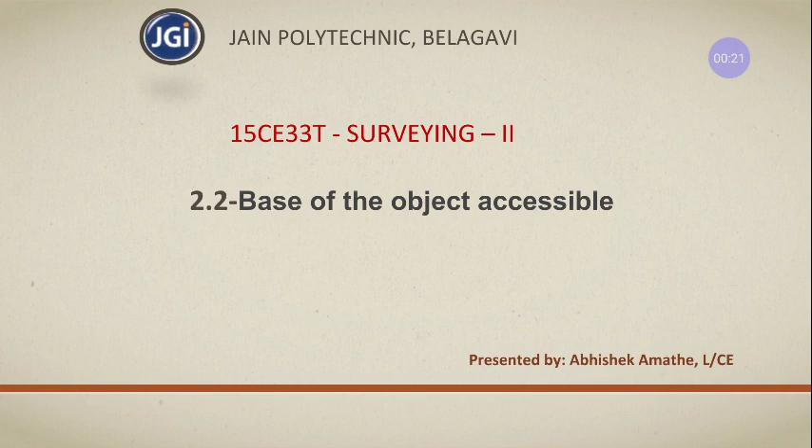Hello students, welcome to the second lecture of the second unit, that is the base of the object accessible lecture. In this lecture we will be studying what is base accessible of the object, and we are going to solve a simple problem over it. So in the content we are going to understand what is the base of the object accessible and then solve a problem over it, right?

So before going to that, we'll once again refresh ourselves. What is trigonometrical leveling? Trigonometrical leveling is an indirect method of leveling where you are going to calculate the relative elevations of the points from the observed vertical angles and the horizontal distance, with the help of the trigonometrical functions, and you're going to calculate the elevations and the distances. This method is also known as height and distances method.

It is also known as height and distances method. Why another name is given to it? Because you're going to calculate height and distances in this method of surveying, right? So which are the 2 cases in which you are going to calculate the elevation points? First is the base of the object accessible, and the second is the base of the object is inaccessible, right?

We'll go to the definition or the explanation of the base of the object accessible. So in this case, at the point A, you can see here, just look at this station point A. There is a theodolite. The dotted line, which is perpendicular to the station point, is your horizontal line of sight.

And in front of the station, there is an object or a tower. The bottom point is C and the topmost point is B here. And the distance we are going to calculate is H, measured with respect to the horizontal line of sight, not from the bottom of the ground, because wherever your line of sight intersects, from there to the point of bisection with the help of the angle, that distance you are going to calculate.

See, your line of sight is intersecting at the point C on the tower, and you are bisecting with the theodolite at the topmost edge of the tower, at point B. So that is the distance you are going to calculate as H. Remember this, you are not going to calculate the whole length of the object, only from the horizontal line of sight to the point of bisecting of the crosshairs of the theodolite. So that distance is H, and the angle made with respect to the line of sight to the tower point B is known as alpha here, right?

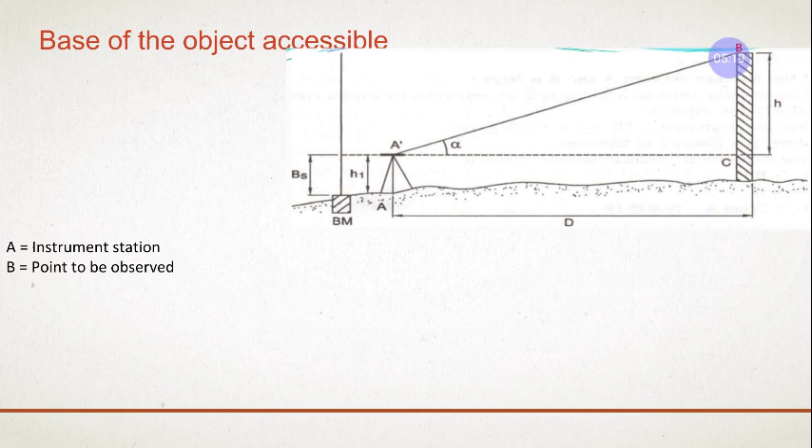So A is the instrument station, and B is the point to be observed. It is the point where you are going to observe or bisect your hair to calculate the angle with respect to the horizontal line of sight.

Next is the elevation of the point B from the instrumental axis. This is your horizontal line of sight, or the instrumental axis. With respect to that, we are going to calculate the elevation. That is your H. What is the horizontal distance between A and the base of the object? What is the base of the object? This is the base of the object, not C. The base of the object is the bottom portion with respect to A.

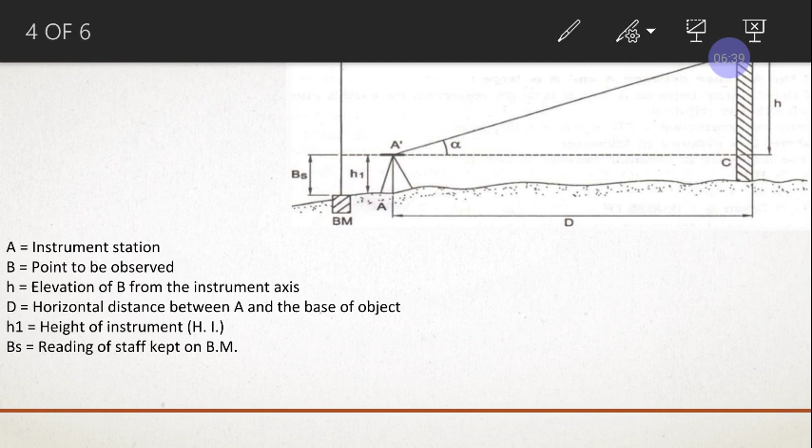Next is the height of instrument. This is your backsight, where you keep your staff and measure the value, the staff reading. That will be your H1. You can call it backsight or height of instrument, H1. Next is the staff reading. When you keep the staff on the benchmark and read the reading, that is called backsight. What is next?

The angle made by BAC. That is a triangle. It is a right angle triangle, because here it is making a right angle. Angle BAC is known as the angle of elevation, and it is represented by alpha.

So now how are we going to calculate the distance or the height? You know the D, you know the alpha. So with this formula, D tan alpha. We are not going to go deep into how the equation came, because for you it is not important. You have to keep this formula in mind.

To calculate H, that is the distance between C and B, from the instrumental axis to the top portion or the point of observation, that vertical distance is called H, which we want to calculate. To calculate that, the formula is D into tan alpha, whatever the angle might be. Just put it here and you will get the value of the height of the object.

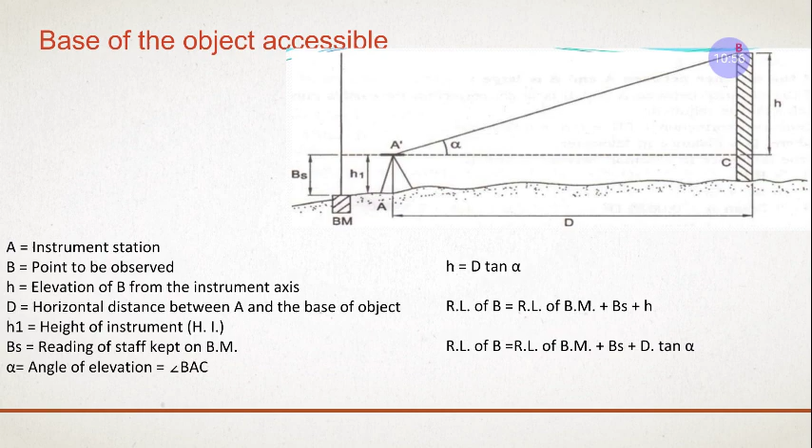So what is H, if we elaborate again? We have just substituted H as D tan alpha, because H is equal to D tan alpha, so we put D tan alpha here. By getting this, you will get the RL of point B. When you go to the problems, you will understand how to calculate and solve them. So without wasting time, we'll go to the problems. So this is a problem.

Okay, an instrument is set up at point P. Now the station point is at P, and the angle of elevation of a vane. Vane means a staff; the top of the staff is called a vane. And the angle of elevation of a staff of 4 meters.

The height of the staff is given here. It is 4 meters. The full height of the staff is 4 meters. The vane means the top portion of the staff, and the total height from the ground to the top edge of the staff is 4 meters. This height of 4 meters is above the foot of the staff, from the bottom of the staff to the top of the staff. What is the height of it?

It is 4 meters. Okay, the staff is held at the point Q, and has an angle of elevation of 9 degrees 30 minutes. What is the angle of elevation alpha? It is 9 degrees 30 minutes. So the horizontal distance between P and Q is 2000 meters. What is the distance between the object and the station point? It is 2000 meters. Right?

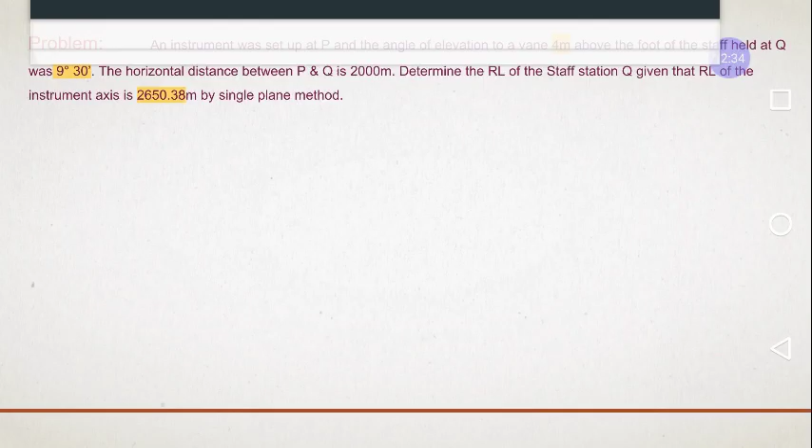Determine the RL of the staff station Q. The topmost portion, we understand where it is. Okay, it is the bottom portion of the staff. In the previous slide, we found out how to calculate the RL at the top edge of the tower. But now in this problem, they are asking to calculate the elevation of the bottom of the staff. So this is a difference. So this last formula of calculating the RL will vary here, and how it will vary, I will show you.

Okay. Given that the RL of the instrument axis is 2650.38. Here there is no RL of benchmark given, and there is no backsight given here. Here they have given the RL of the instrument itself, the horizontal axis or the horizontal line of sight. I will show it in the diagram. By the single plane method, you have to calculate this problem.

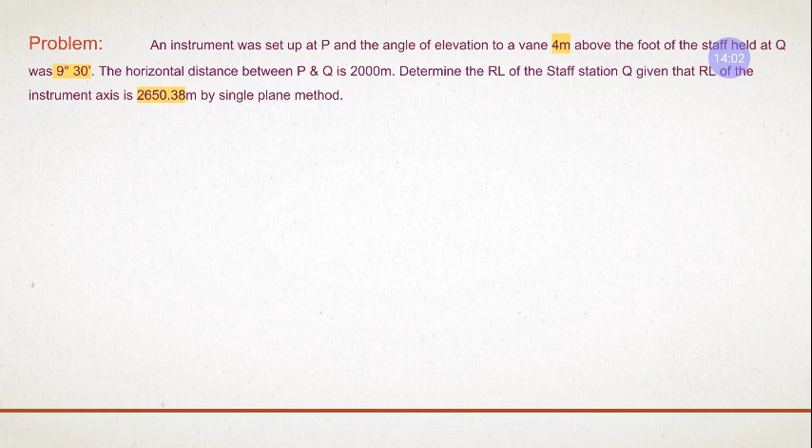That is, the base of the object is accessible. It is also called the single plane method. We will understand how the object looks. In this case, the station is at point P, the distance between P and Q is 2000 meters, and the height of the staff is 4 meters, from the bottom of the staff to the top of the staff. And the angle of elevation is 9 degrees 30 minutes. You have to calculate the RL of the bottom of the staff, not the top of the staff.

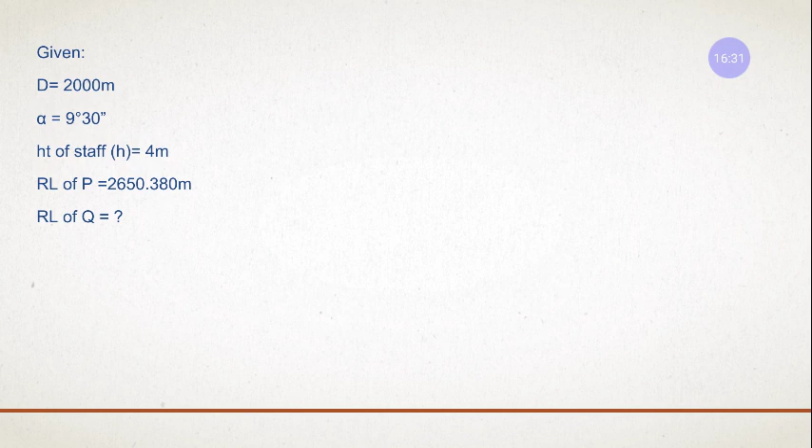Next, you have to calculate the bottom of the staff. What do you have to calculate? The RL of the bottom of the staff, that is Q. You have seen the previous image, right? So before starting, first, if you go back to the image, here it is, right?

You first have to calculate the height from the top, because you can't bisect the bottom portion, right? If you could bisect the bottom portion, then it would be different. We can't bisect here because, if it was visible, then it would be different. Here it is visible, but in some cases it might not be visible as per the drawing. So we are going to bisect it at the top portion of the staff here at this point, right?

As you see, the angle of elevation is given, and you know the D. So what can you calculate? You know the D, you know the alpha. So with the help of the formula H = D tan alpha, you are going to calculate the height, this vertical distance. Once you have calculated it, you know the P value here, that is, your RL of P is known.

From there you add H, and you will get the RL of the top portion of the staff, that is the RL of the vane, minus 4 meters. If you do minus 4 meters, you will get the RL of Q, right? What I am saying is, you know the RL of P, just add the height of the staff with respect to the horizontal line of sight, that is H, and then minus 4 meters from here you will go to Q, right?

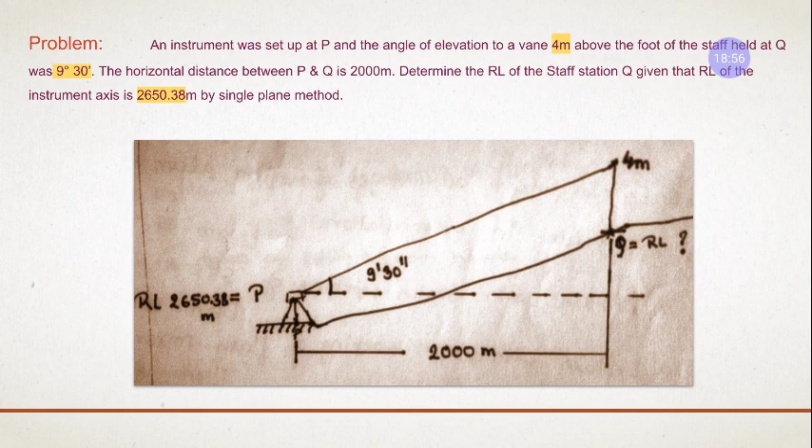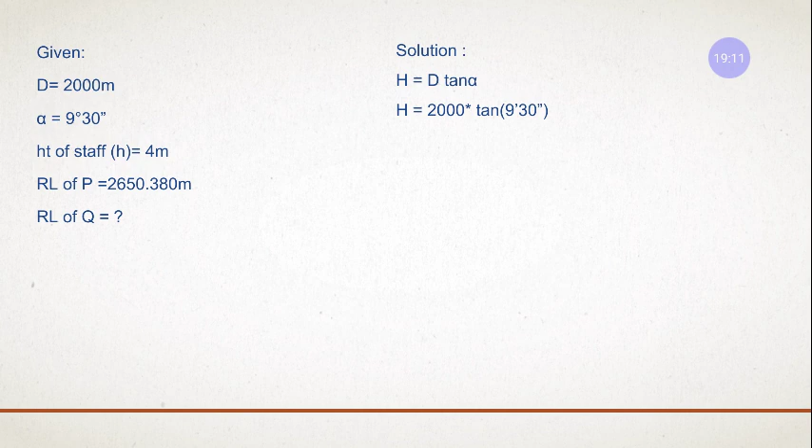So with the formula H = D tan alpha, you are going to substitute the D and alpha values, right? Then calculate its value. What is the height of the top of the staff with respect to the horizontal line of sight? It is 334.685 meters. That is the height, right?

Now once you have the height, you have to calculate Q. That has been asked. They have asked the RL of the point Q, that is the bottom portion of the staff. So for that you have the formula I mentioned: the RL of P plus the height of the object with respect to the horizontal line of sight, minus the height of the staff. You go up, and minus 4 meters, you go back to the staff reading, as I explained in the previous slide, right?

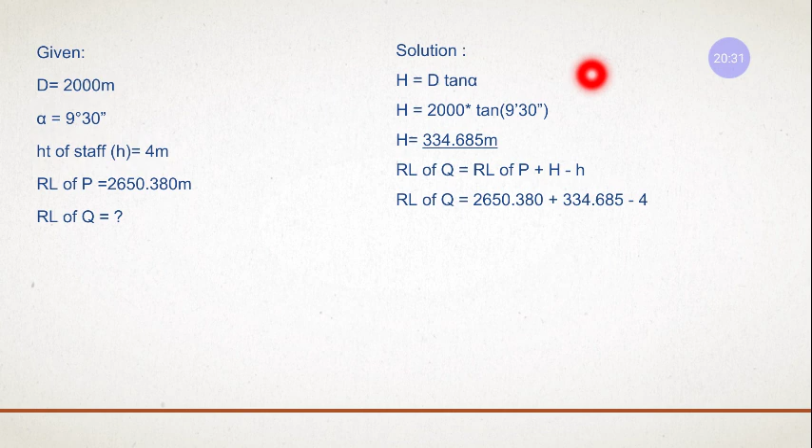Now substitute the values. The RL of P is given here, right? You calculated capital H, substitute it here, and the height of the staff is given, that is 4 meters. Put it here. See, we are going up here like this. With respect to P, you are going to the top of the staff, right? And we want to come back down. So we want to minus here, not add. This is the difference in this formula for calculating the RL of the object.

Only with the help of the diagram will you be able to understand whether you are going to minus it or plus it. You have to understand the diagram and understand the problem. That is very important. Now when you substitute into the equation, you will get the value. The RL of Q is 2981.065 meters, the RL of the point Q, right?